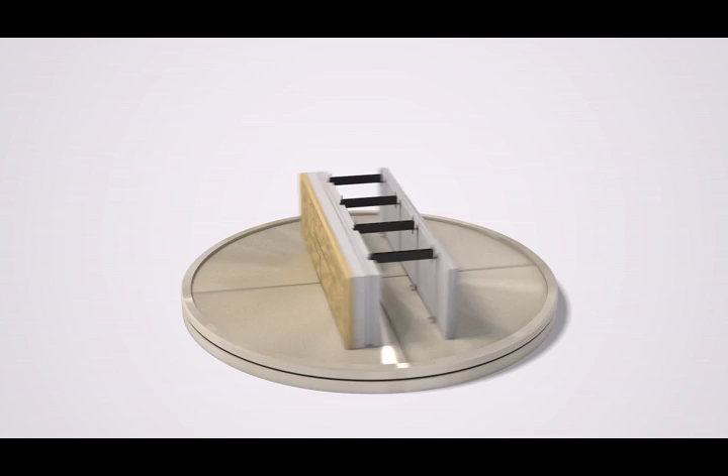Never before has building construction been so easy, fast, and profitable. It became possible thanks to the innovative technology by EasyBuild. The technology in question is based on the decorative permanent formwork. Let's have a closer look.

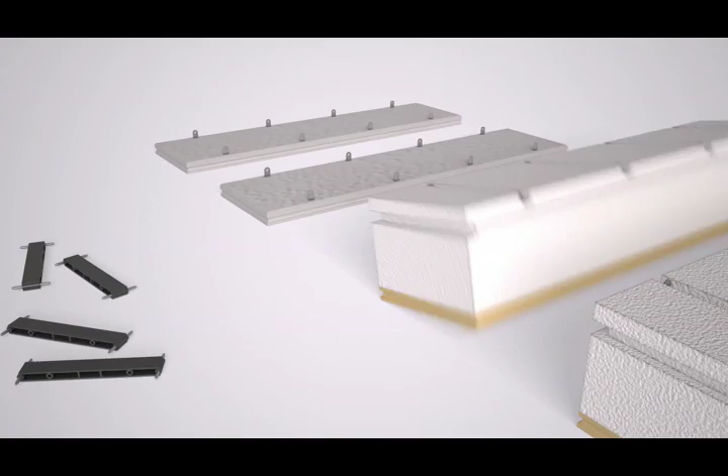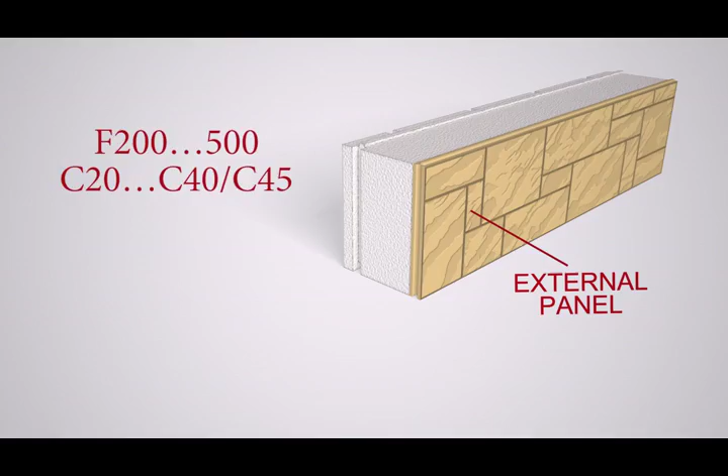The decorative permanent formwork consists of the external decorative panel with an integrated layer of insulation, the internal panel, and connecting fitting pieces. The external panel is manufactured from the decorative concrete from 200 to 500 marks. This way, during the construction of a wall, both its future facade and the internal part of the construction are getting instantly decorated. The elements of the decorative permanent formwork are connected to each other with the help of a key groove, which turns the construction of a building into child's play, just like assembling a toy construction set.

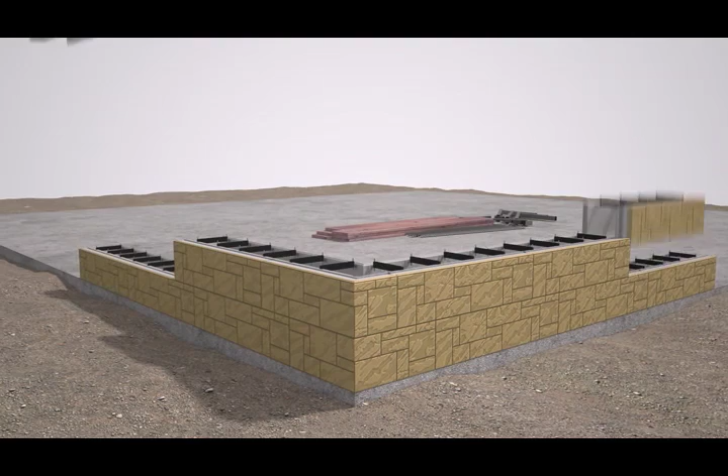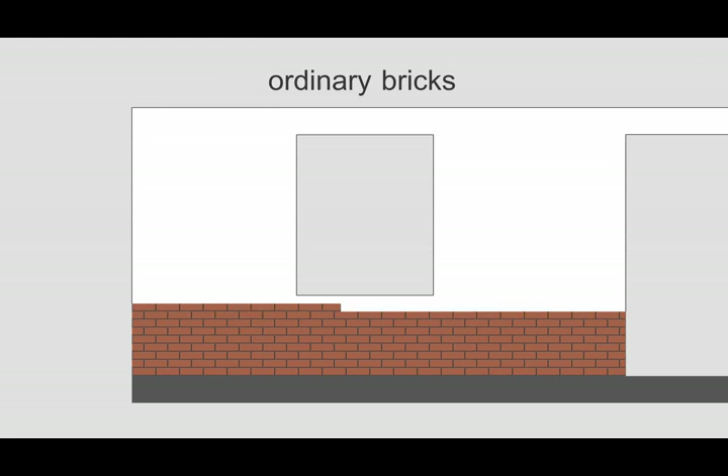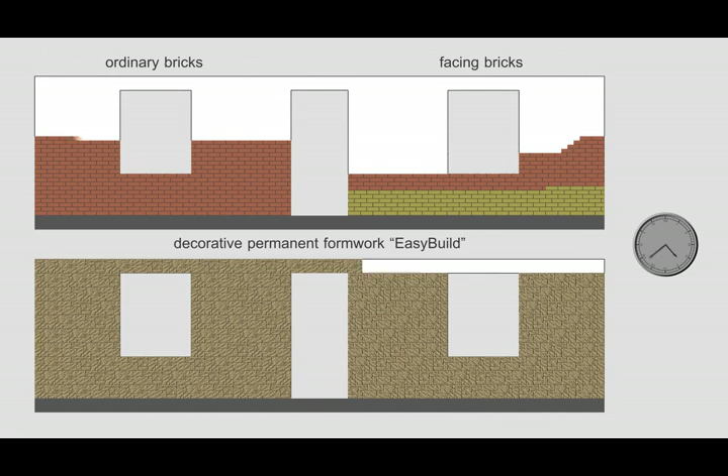This eliminates making any mistakes during construction, avoids concrete leakage, does not require the use of highly qualified staff, accelerates the assembly process and the decoration of the entire construction by 70% in comparison to the traditional building schedule. Thus, with traditional bricklaying, within one shift, the builders lay just 8 square meters of ordinary bricks, or 3 square meters of decorative facing bricks. Whilst with the use of the decorative permanent formwork, the same builders could lay 25 square meters of the wall within one shift.

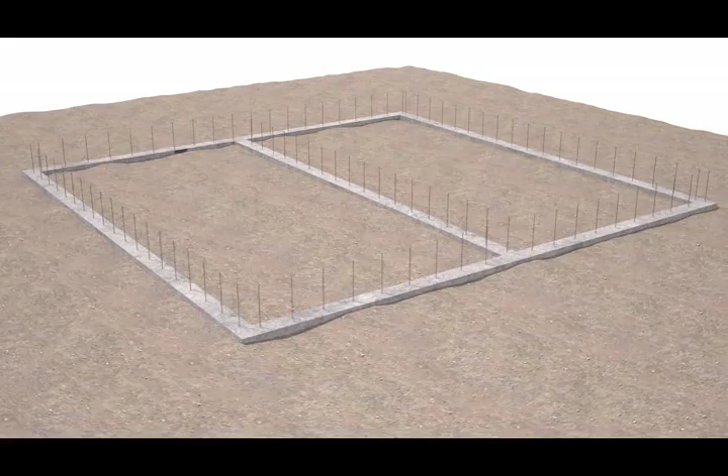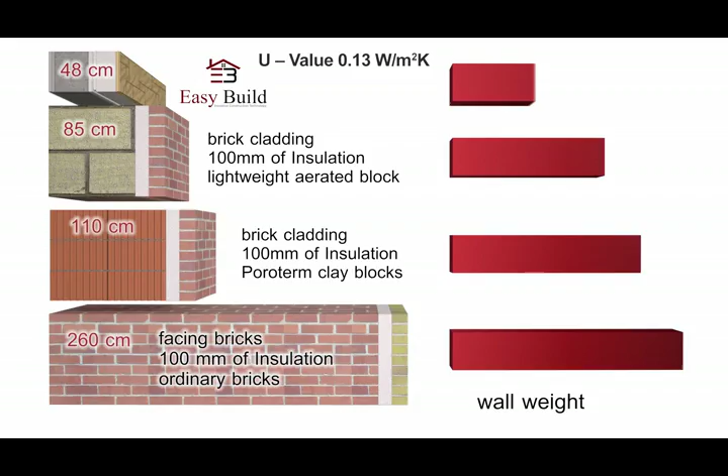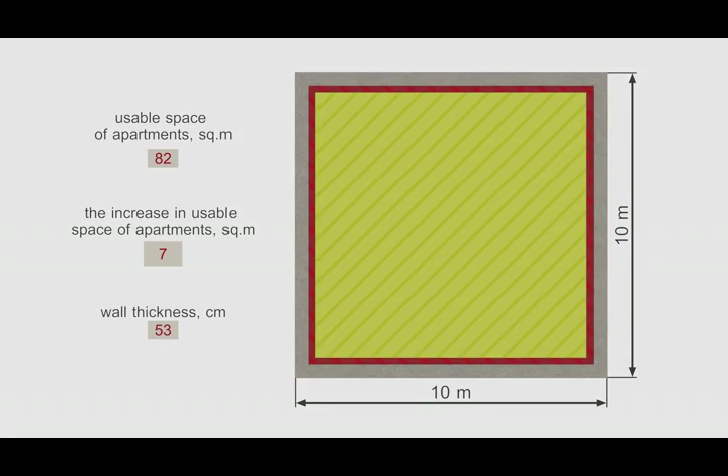This technology allows for the works to be carried out on any type of foundation: tape, pile grillage, slab, etc. The thickness of the walls and the overall mass of the construction are significantly less than those in traditional building construction. Due to this, the construction creates less pressure on the foundation, resulting in a more economical use of the materials from such an early stage of construction. Additionally, the decreased thickness of the walls increases the size of the effective area of the building by 11%, which is another important advantage of this technology if compared to traditional bricklaying.

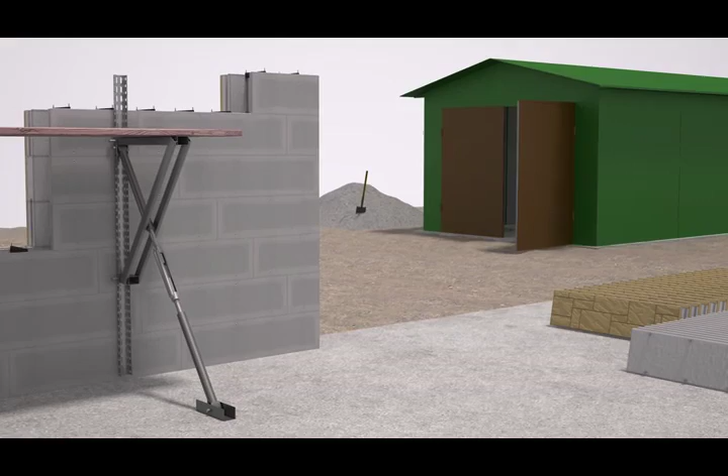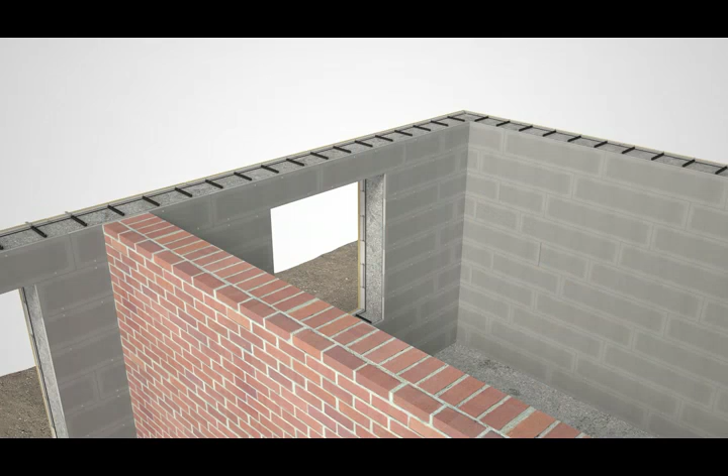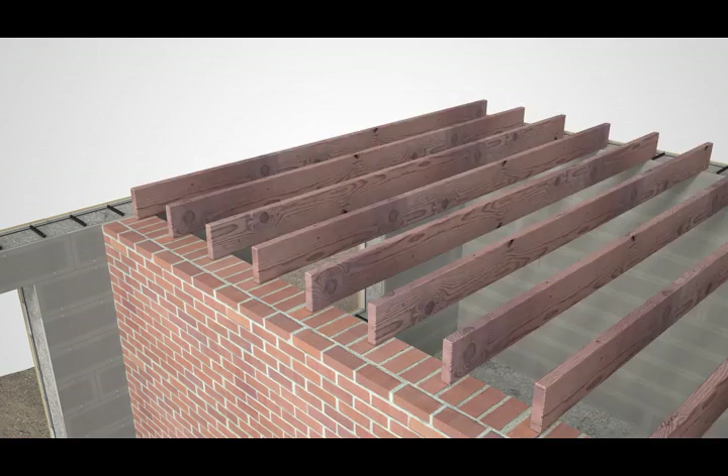The panels of the decorative permanent formwork can be either delivered to the building site or manufactured on-site. This technology allows you to work with all architectural geometric shapes and any angle of the corner bay windows, including ovals. The decorative permanent formwork can also be used with any types of floors and ceilings: monolith, wooden, slab. The panels can be assembled horizontally or vertically depending on the architectural requirements.

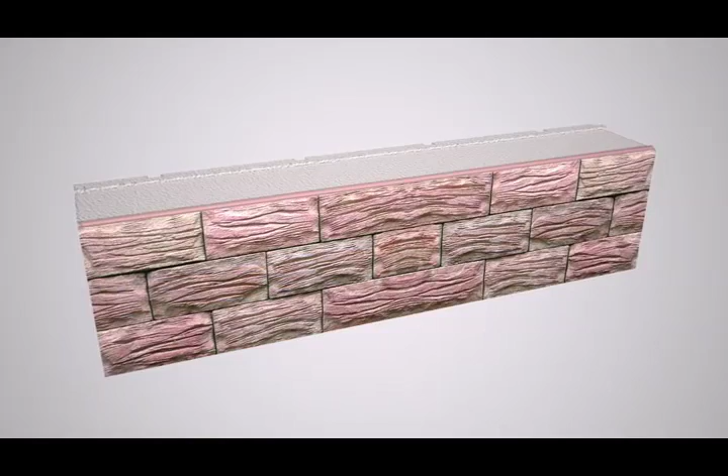The external panel can be prefabricated with any surface faux stone finish in any color depending on design. The thickness of the insulation layer may also be varied as per customers' requirements and climate peculiarities of the territory. The internal insulation does not interact in any way with the outside environment and is fireproof. A variety of insulation materials can be used: styrofoam, foam glass, mineral plates, etc., including the non-flammable materials.

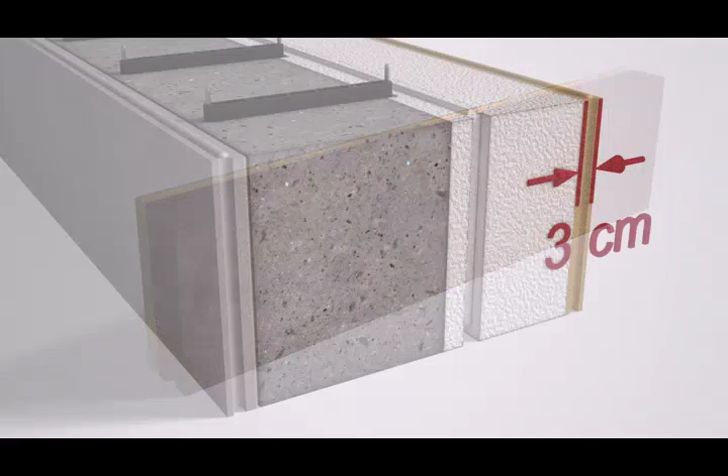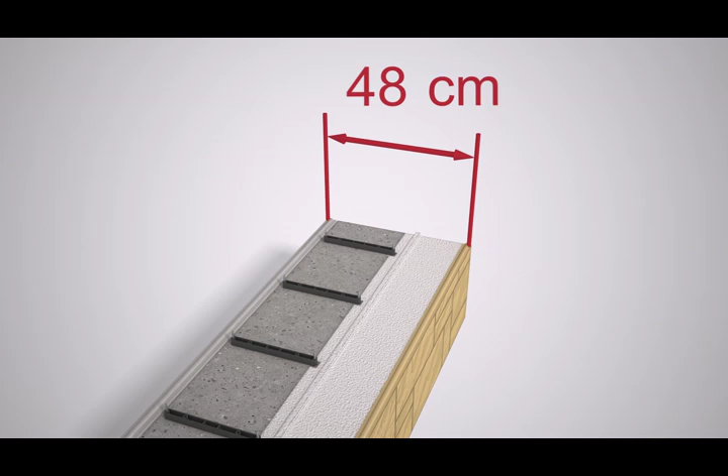Unlike traditional building technologies, the use of the insulation with the decorative permanent formwork does not significantly affect the thickness of the wall. Thus, a 48 cm thick wall built with the decorative permanent formwork would have the thermal insulation similar to a 2.6 meter thick brick wall. These walls have minimal heat loss, and the inner wall panels act as thermal compensators, accumulating heat and gradually releasing it during the ventilation of the room.

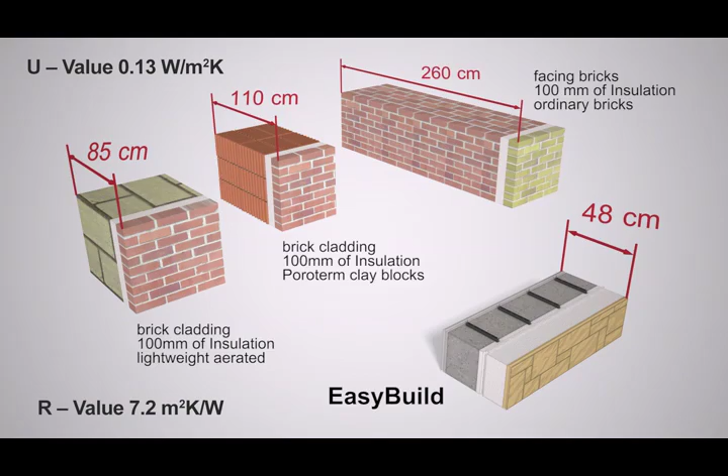The technology used by EasyBuild avoids reducing the coefficient of thermal resistance due to the ingress of moisture into the wall, as a layer of insulation is completely isolated from the environment. Walls have good water vapor permeability. Integrated connectors and formwork panels are made of stainless steel and are not subject to corrosion, and allow you to build in corrosion-aggressive climate zones.

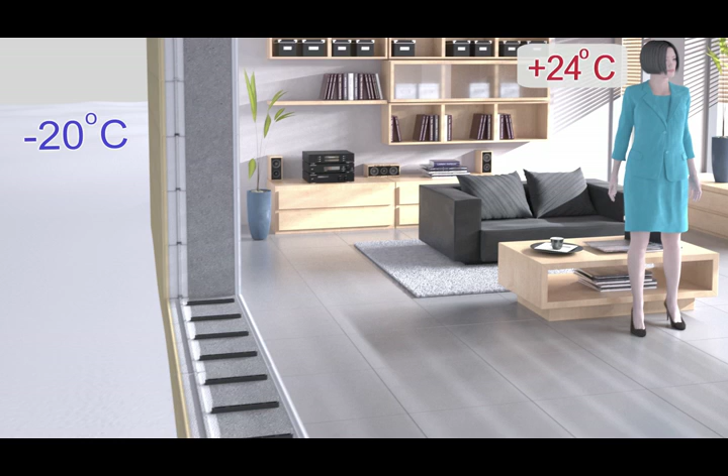Due to the increased savings in the operation of the building, the walls retain indoor heat. The temperature difference in the center of the room and the inner surface of the wall is only half a degree. In comparison, the difference in brick houses is 5 to 7 degrees.

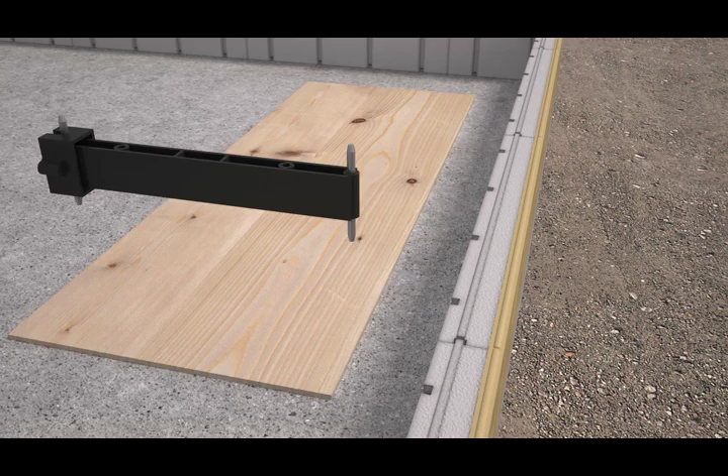The inner wall panel can also be made out of decorative materials at the production stage. This way, the interior decoration of the premises is constructed instantly. It is possible to use plywood panels instead of fixed internal panels, which can then be reused. This option is very advantageous if an interior decorative surface is not required or for use in large construction projects. Inner walls and partitions can be formed using any construction materials or with the use of a permanent formwork. The building has a perfect geometric shape and dimension.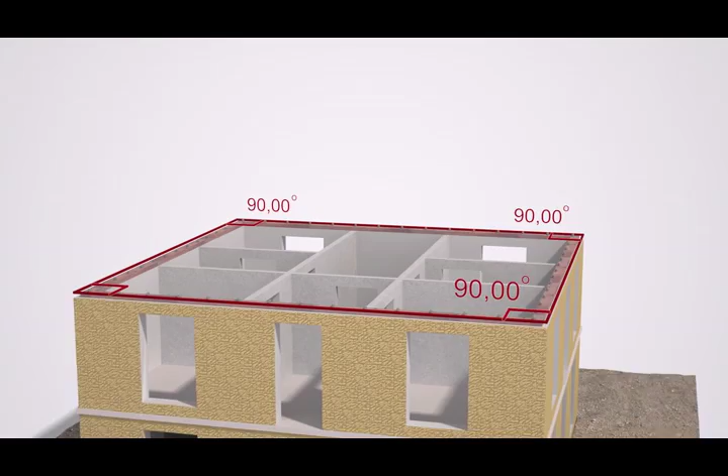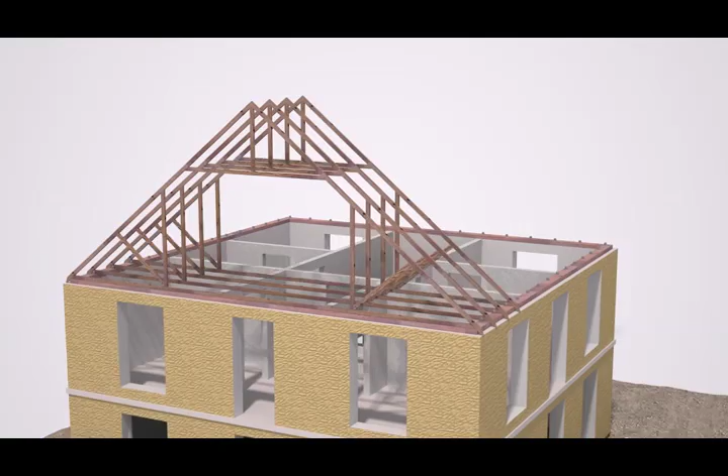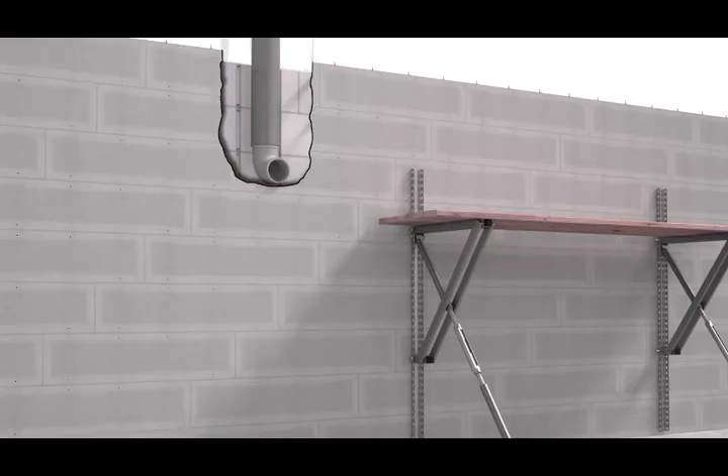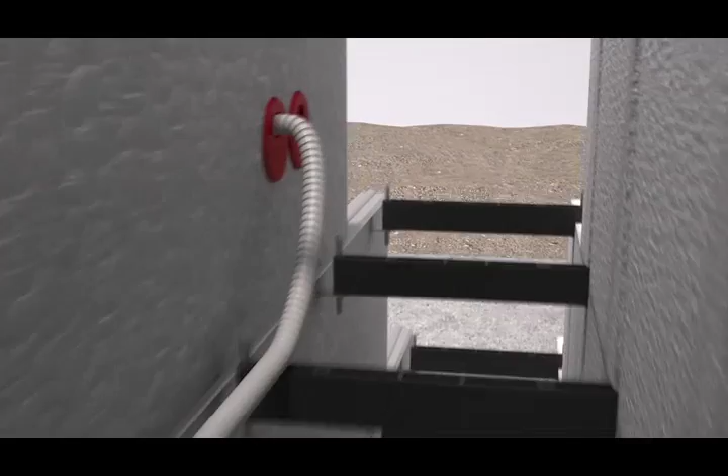Time needed for roof installation is significantly reduced due to the fact that the trusses, i.e. the roof structure, are made on the spot or at the production stage. Internal building communications such as electricity, water supply, drainage, ventilation, and chimneys are laid between the panels. This allows for complete freedom with regards to all design decisions. The installation of communications is significantly faster compared to other construction methods and does not require highly skilled professionals. There is no need to make wall grooves and hide the wires, pipes, and other communications. All this takes place at the construction stage, significantly reducing the time for finishing work.

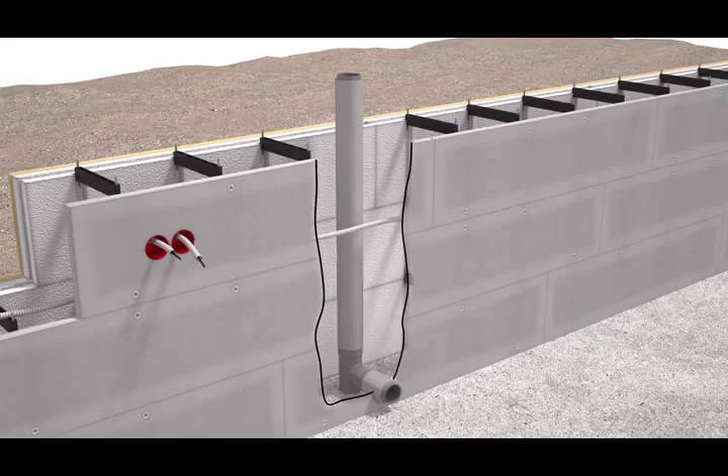EasyBuild technology uses quick-release scaffolds, which serve as leveling guides for the wall mounting blocks. This facilitates a strict verticality and considerably reduces the time needed for the installation of the wall. Scaffolds are attached to the internal elements of the formwork and can be easily adjusted to the desired height.

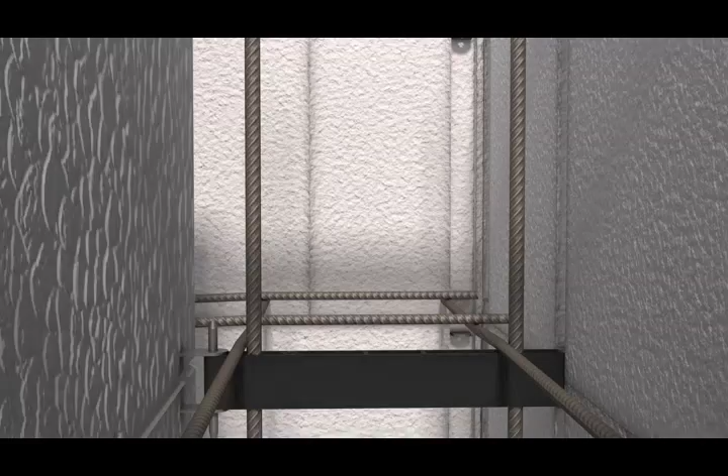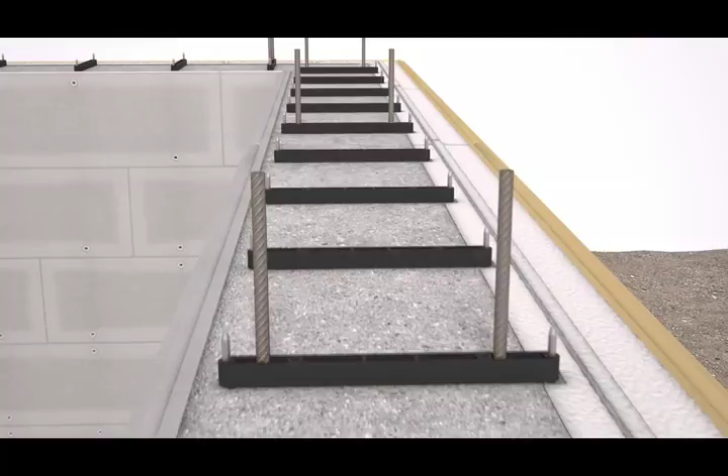The space between the external and internal panels is filled with lightweight concrete, such as expanded clay concrete, foam concrete, polystyrene concrete, and vermiculite concrete. Depending on the technical requirements, the filling is performed in a monolithic wall or the monolithic frame form. The use of additional stiffeners of heavy concrete may be implemented. Depending on the conditions, a further seismic reinforcement structure can be used. Wall thickness of the fill may vary depending on the design requirements for buildings and facilities.

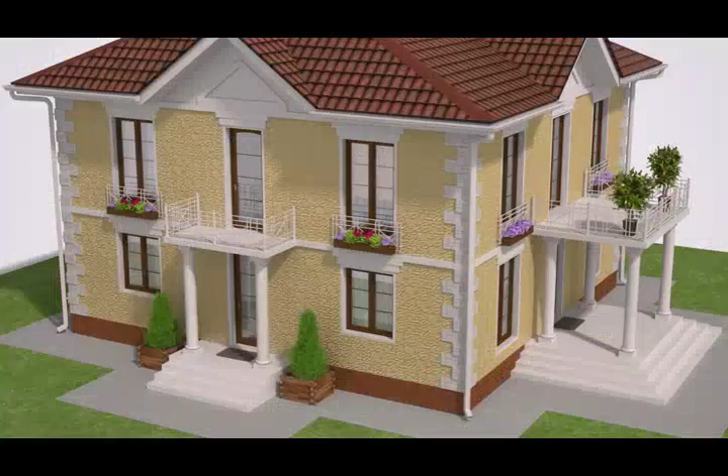EasyBuild's technology is already actively used in the construction of houses, garages, fences, and even swimming pools. It can be used for the construction of municipal facilities such as schools, hospitals, and barracks. Most importantly, any build becomes easy, fast, and cost-effective.